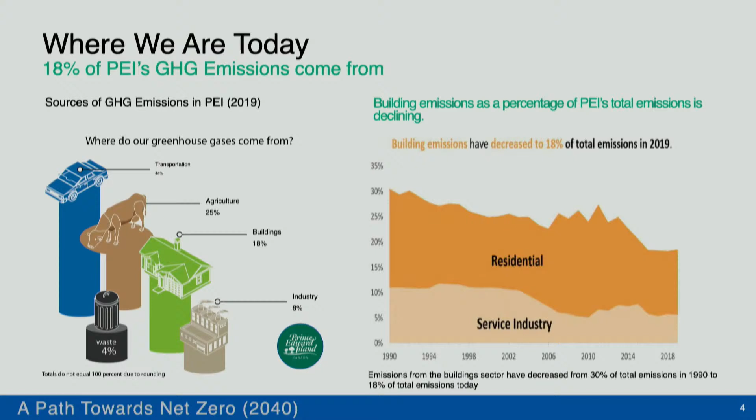I'll get into a little bit of what we intend to do, and you'll see a sneak peek from our soon to be released net zero plan for the province. So in general, we've got three main goals for this chapter.

The first is to make existing homes and buildings more energy efficient. So facilitating retrofits, the adoption of energy efficient measures, and switching to cleaner fuels in island homes, businesses, and government buildings. So we're talking about existing buildings.

Secondly, we'll construct or try to incentivize the construction of more efficient homes and buildings. To do that, we think we need to be at the forefront of national building code adoption, and the adoption of stretch codes beyond the current building code on PEI.

And thirdly, we would like to pilot and scale up cost-effective solutions on PEI, looking to become a demonstration site to scale up and pilot early stage and innovative systems and technologies. What I'm talking about there is not just heating systems, but building materials, building envelope materials, windows, doors, insulation, you name it. Anything that can reduce our carbon footprint in this sector, we would like to be at the forefront in researching and scaling up and deploying those technologies.

So I think those are our three high-level goals for this sector, and I'll get into a little more detail on all three here on the next few slides. Firstly, and this may be the most difficult of all three, is to make existing homes and buildings more energy efficient. So we know that we need to facilitate the adoption of energy efficient measures.

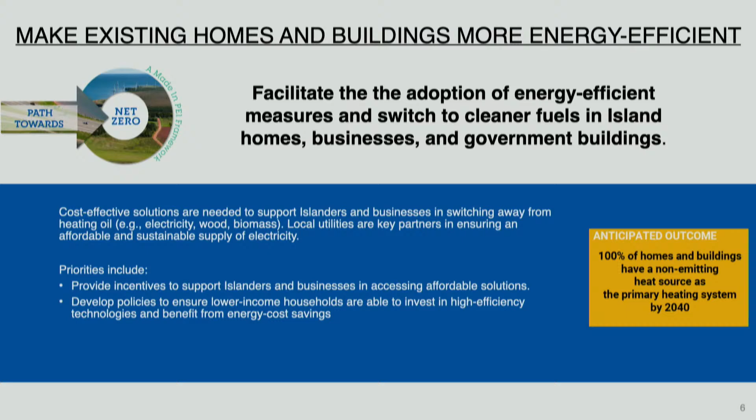On the second goal here, constructing more efficient homes and buildings, we'd like to be at the forefront of national building codes and the adoption of stretch codes for PEI. We're looking to establish the necessary environment and supports to facilitate adoption of the National Building Code and National Energy Code, develop and support stretched or advanced code provisions for PEI that exceed national building codes, and lead by example through investments in net zero ready, net zero new construction of government buildings, including schools and hospitals, in partnership with the federal government.

We'd like to provide incentives to support growth in building affordable, energy efficient homes and commercial buildings, including programs specific to the needs of low-income islanders. So in this case, we're doing what we can to be at the forefront of national building code adoption.

We also want to make sure that when people are making decisions on new buildings, whether residential or commercial, we're incentivizing them to make the best decision possible to reduce their energy consumption and greenhouse gas emissions. We can do that essentially through carrots and sticks, and one of the tools we have at our disposal is the new home construction program at Efficiency PEI.

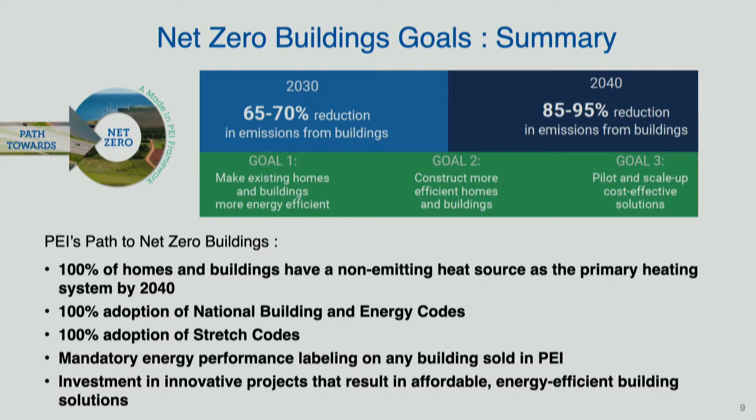To summarize, this sector in particular is one where we've made really good progress to date on PEI. There's significant momentum in moving away from fossil fuel heat. We've got a really mature suite of programs here, government incentive programs delivered through Efficiency PEI, that all lead to some really good momentum in the right direction. Really happy to share these targets with you folks, and interested to hear some of your questions, and I'll throw it back to Bill.

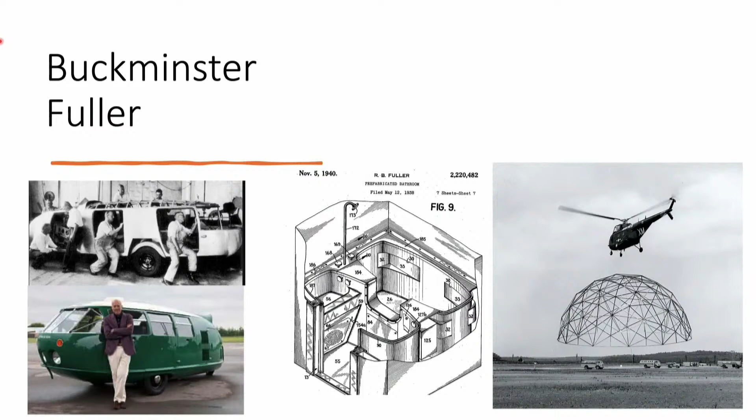In the bottom left is a picture of Norman Foster, who commissioned a replica of the Dymaxion car to be built, so he actually does own that. Norman Foster and Buckminster Fuller had a professional friendship going back a long ways, to the point that Norman was giving Buckminster a tour of the Sainsbury Centre. This might look familiar to a lot of people in the architectural industry in Norwich, England.

Foster was well known for his light and airy structures, and this is sort of exemplary of that. But at the end of the tour, they went for coffee, and Buckminster says, 'But Norman, how much does your building weigh?' He didn't have an answer for that, and I think most architects would not. Perhaps our structural engineers would, but we'd be hard pressed to say how much a building weighs. By the end of the week, he did have the answer: it was 5,328 tons, and most of it was hidden below ground.

So it leads into where we're going now with talking about the impact of materials and the weight of materials. Where Buckminster was focused on the mass of materials, we're now moving into something where it's not just mass, it's the emissions associated with materials.

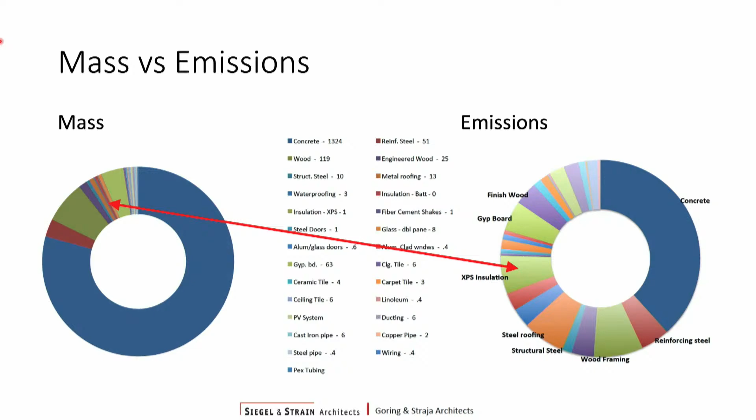This slide shows an example. Siegel and Strain Architects did a very detailed life cycle analysis of the structure, envelope materials, and finishes in a commercial building. On the left you see the mass of each product; on the right you see the emissions associated with those products. It's quite different - by mass it looks like about 80% concrete, but the emissions from concrete is only about a third of that. Likewise, the XPS extruded polystyrene insulation barely shows up as a line on the mass side, but becomes quite significant on the emissions piece.

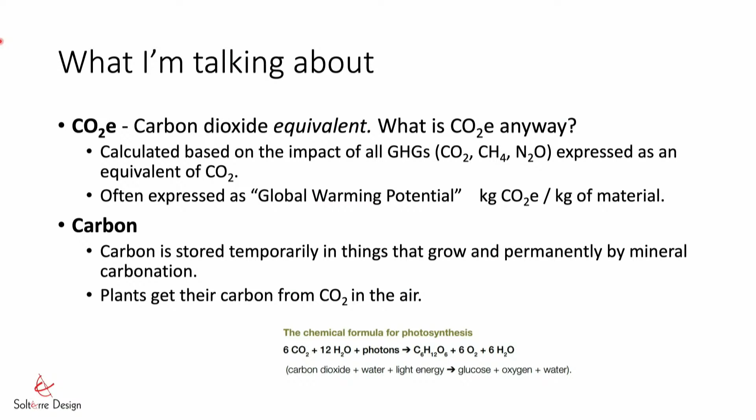So what are we talking about when we talk about emissions? For the most part, we're talking about CO2, carbon dioxide. People often use CO2 and carbon interchangeably, but our buildings don't have carbon emissions, they have carbon dioxide emissions, and they have other emissions as well. In general we're talking about greenhouse gases, GHGs. Because there are other greenhouse gases besides carbon dioxide, we usually see it expressed as a CO2 equivalent, or CO2e - that's the terminology you'll see. When talking about materials, emissions are discussed in terms of global warming potential - that's the significant focus.

But there are a lot of other impacts that materials have - we're not even talking about acidification, particulates, smog, and a bunch of other impacts materials have. So when you get into that type of analysis, it can change the game a little bit as well.

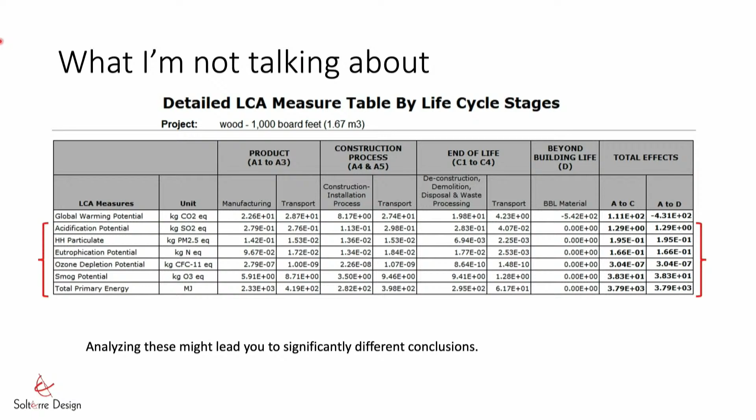It's the carbon involved in the manufacturing of those materials. We'll talk a bit more about where that embodied carbon impact is. But I think most of us could agree that we don't have 90 or 100 years of a building life that we need to look at. We're looking at something more immediate.

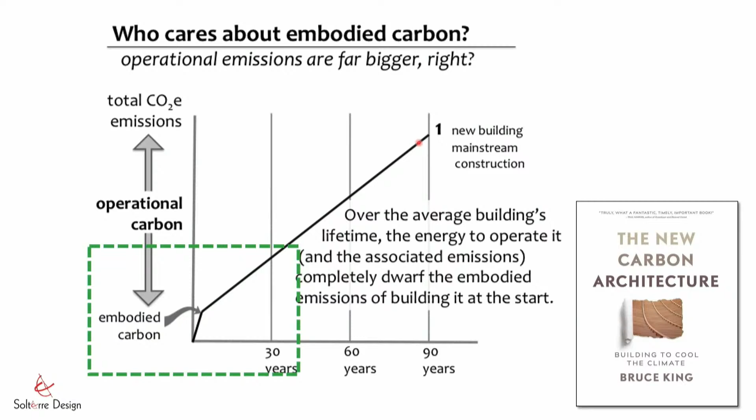2050 by Canadian targets to be net zero, 2040, which is fantastic to hear for PEI's goal. And some people are even saying 2030 is what we should be looking at. So if we narrow that down, this embodied carbon piece becomes a lot more significant.

The other part of it is the operating efficiency of the building becomes a factor as well. Obviously, the less efficient a building is, the steeper this emissions curve along the top is. If we build an energy efficient building, that curve becomes much less. And for all intents and purposes, a net zero building has no operating emissions along this line as well.

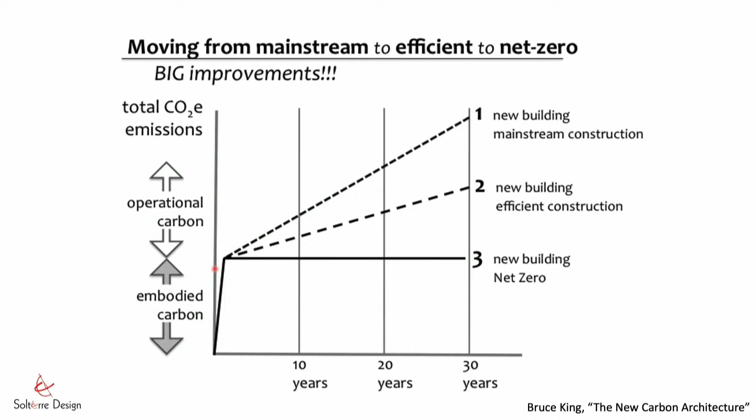So when you get to a net zero building, almost all of its emissions are associated with the embodied carbon. And that's why, as we talk about net zero emissions or operations, we need to talk about the embodied carbon part as well.

The other thing that's important about embodied carbon is it happens before the building is even opened. So that impact happens for the life of the building, as opposed to incrementally in tons per year of operation. A ton of CO2 emitted at the beginning of the building actually has a greater impact than a ton emitted in the 10th year, the 30th year, or the 100th year. So the time value of CO2 is also an important factor.

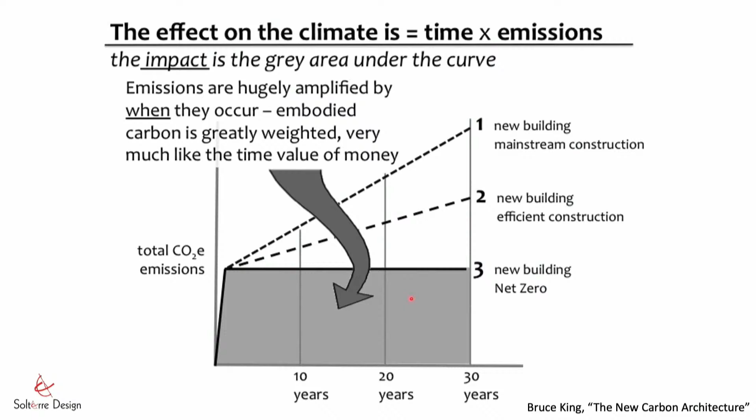Now here's another one to think about. Another strategy is, why should we build new when we can retrofit? We have a significant amount of embodied energy, embodied carbon, embodied emissions associated with buildings that are already built. So what happens if we retrofit those and improve their performance as opposed to building new? I'll show an example of that later on.

So here's the hypothetical. The embodied energy in a high performance building here is much lower than a new building. And if you do a high performance retrofit, its emissions are going to be lower even than the embodied carbon of a new building.

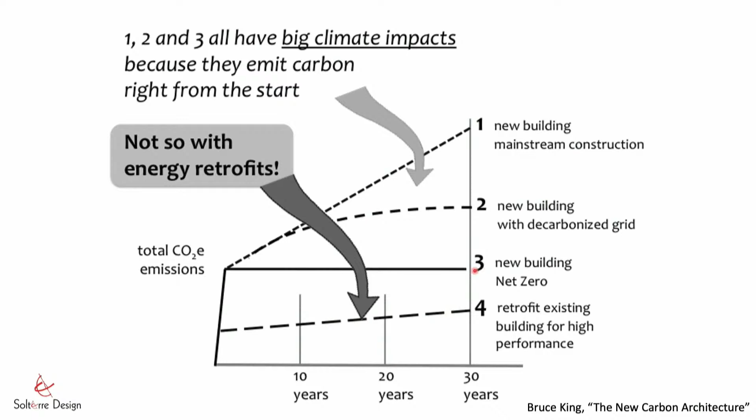Now, when we talk about the embodied impacts, this is an internationally acknowledged life cycle stages of materials. There's the product stage, which is A1, A2, A3 - that's when the product is being manufactured. Then there's the construction stage, the use stage, and the end of life stage. Each of those does contribute to the overall life cycle or overall impact of a product or a project.

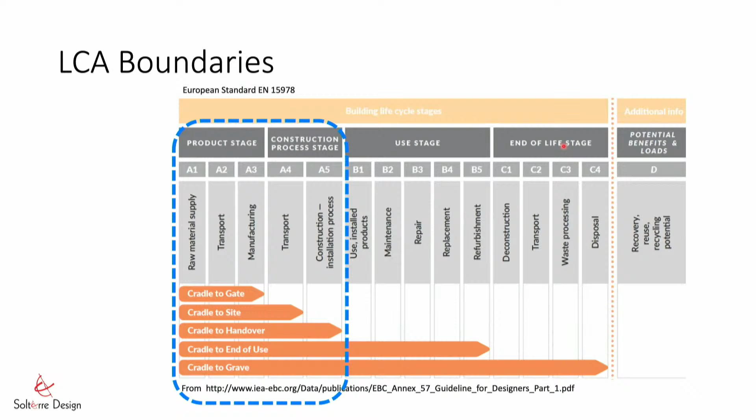But if we look at how that breaks down, here's a school that we did a life cycle assessment for. We looked at the envelope and the structure. So there's two things that immediately jump out at us. One is that the structure, in this case, was by far the greater impact than the envelope.

The second thing that is obvious is that the first stages of manufacture, shown in blue here, and then the transportation and construction, take up 80% or more of that impact. So a lot of that impact happens right at the very beginning of the project, and much less so carries on through the use stage and the end of life stage.

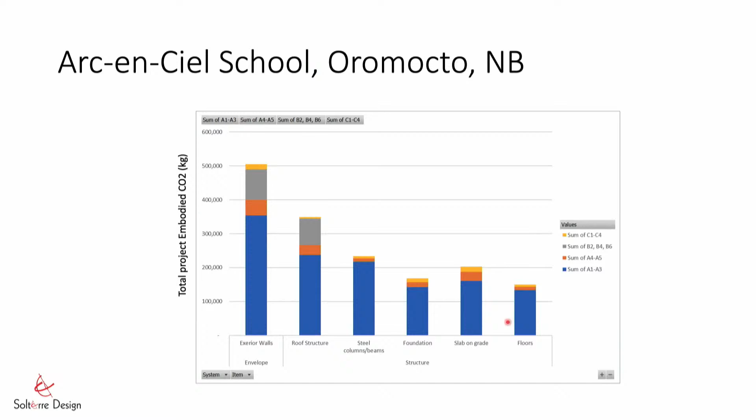If we take a look at a breakdown of the envelope versus the structure, we'll see that the roof structure in this case was the most significant piece, and foundations, slabs and floors were on the lower end. But overall, the structure remains the most significant piece.

Now, one strategy for dealing with carbon is to look at the very fundamentals. What is the project made out of? Here's a very simple model using the Athena Impact Estimator life cycle analysis program, where I just took a 30 by 30 meter single floor and did three designs.

One was with steel columns and beams using a 7.5 meter by 7.5 meter grid. Another was using concrete on the same grid, concrete with a 6 meter by 6 meter grid, and wood with a 6 meter by 6 meter grid.

And the output that comes from Athena clearly shows us that wood is a lower impact structural system, which is not a surprise, I think. It also shows that even within the same construction systems, the way you design the spans and the complexity of the design make an impact as well.

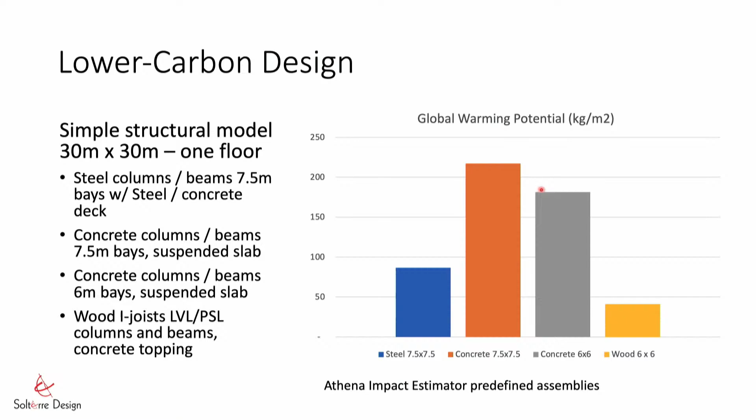When it comes to looking at materials themselves, there's a lot to take into consideration, and every product usually has a fairly significant range of options.

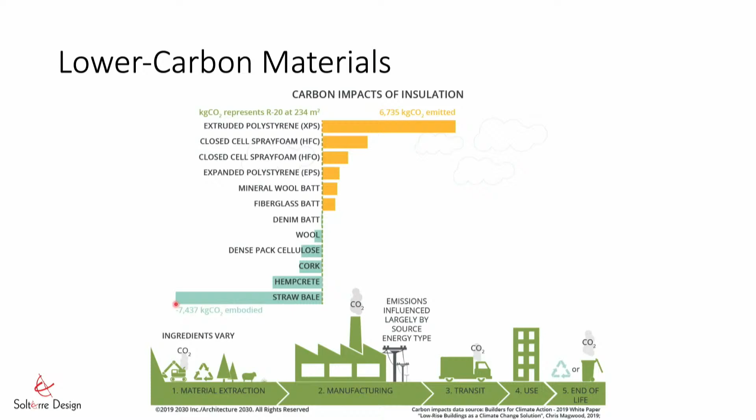As we come down to lower and lower impact materials like mineral wool, fiberglass, and denim, we're starting to get into natural materials. The reason they're on the opposite side of this center line is that they actually sequester carbon—as they're growing or being produced, carbon dioxide is absorbed as they grow. So these products actually have a negative impact in a positive way on greenhouse gas emissions.

You'll see more and more carbon sequestering materials come onto the marketplace already—there are quite a few. It's often in the finishes, framing, and insulation materials. I'm not going to go through this entire list, but it's a growing list of products that actually sequester carbon in them, so they counteract the adverse effects of materials.

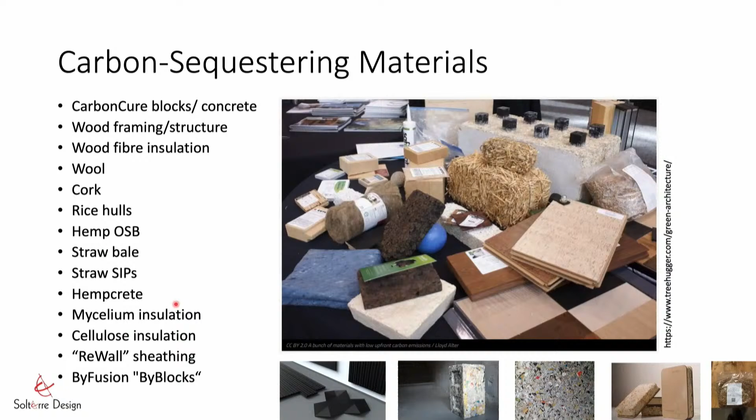Without getting into a lot of detail, there's a lot of debate about how you account for wood. Yes, wood is a lower energy material, but what is the source of that wood? For example, if we all decided to build all buildings out of wood right now, we'd be in dire straits from a forestry industry standpoint, and we'd have a lot of other unintended consequences.

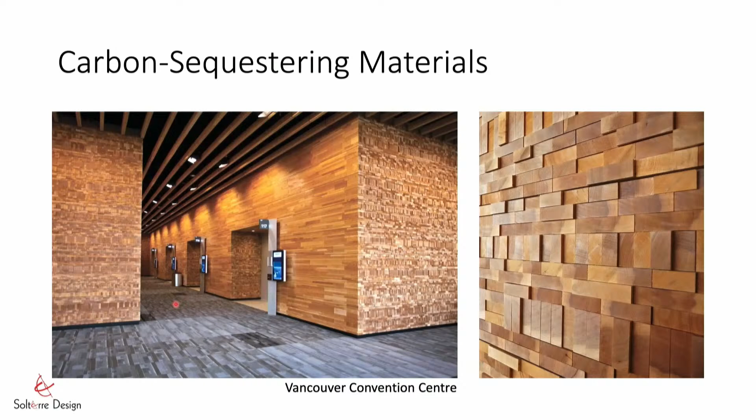So I'm going to jump in here to answer Bill's question about what we're up to here at Solterre on this topic. Keith, as you can tell, dives deep into all things advanced and leading in green building, and has now for a number of decades. We've been able to expand this discussion into the school system.

We've been teaching at the School of Architecture in the master's program for the last 3 years, a design and tech collaborative, or co-requisite course, called Net Positive Architecture. We're really pleased that this school sees this needs to be something particularly focused on within their curriculum. It's been a really fun opportunity for a team of us at Solterre, 4 of us in fact, teaching as a collaborative.

This is a screenshot from a concept board, a data generating, idea generating conversation we had with our students. In the past 2 of the 3 years we've been teaching, it's been online, so that's been an interesting one. We're seeing that the vocabulary is getting really rich—it's not just all called green building or being a green architect or a green firm.

Certainly we're in this net zero conversation, but we're really needing to push it all the way towards a regenerative building. So we're talking about doing less harm on the carbon front, as Keith has outlined, and pushing our work towards net zero and net zero carbon, where we're doing less harm, or better, the living building challenge—of which we have a few examples locally or in the country and a few more worldwide—is a program we can work towards. We have yet to have a living building certified project here at Solterre.

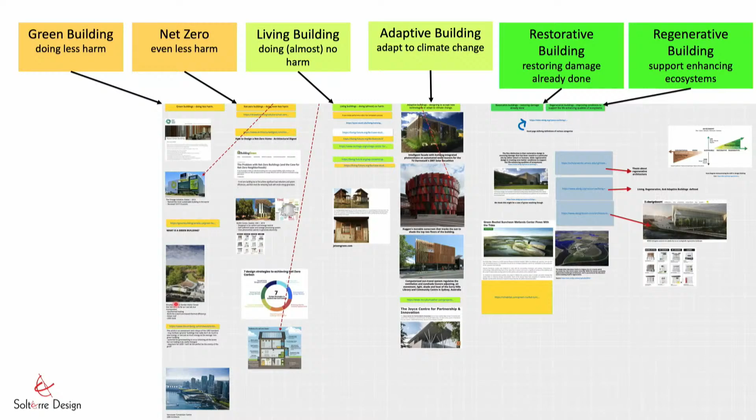But we're talking about adaptive building towards restorative building. In fact, our sights should be on regenerative building as the ultimate goal, where we can be enhancing our ecosystems rather than just thinking we're doing better. There's some pretty exciting work out there worldwide, and certainly students with their curiosity and researching minds are pushing us, and we're kind of along for the ride on that front.

Some of the projects that are a little closer to home that we have looked into more thoroughly—this one, you might be familiar with it.

Chris Magwood is a colleague at the Endeavour Centre in Peterborough, Ontario, where Chris has not only easily achieved net zero energy on this project, or almost all of his projects, but is also looking at zero carbon, zero toxins, zero construction waste. This project, called the Zero House, had a bag and a half of commingled waste, not even close to what we'd normally see on our LEED spreadsheets.

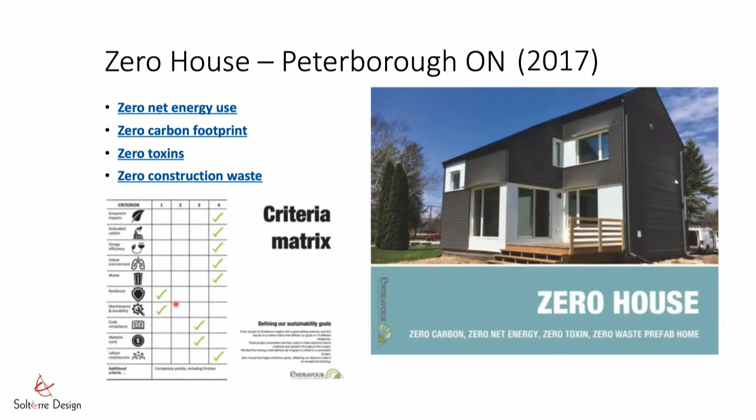This house has been disassembled and re-erected, I believe, three times as a demonstration to show that designing for disassembly with low carbon materials, if not those materials on the blue side of Keith's chart, allows this project to be a fantastic example of heading towards regenerative.

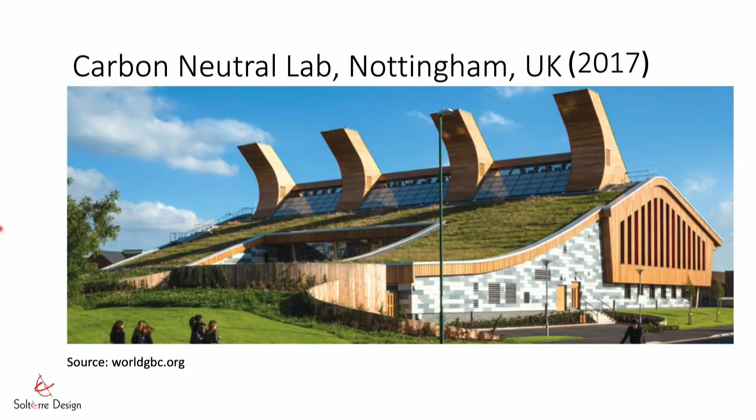Another interesting project, certainly scale-wise, is outside of the residential field, out of Nottingham, UK. We're seeing a lot of projects pushing the boundaries or heading into Living Building Challenge in the university or research facilities, where budgets tend to be available. This one is almost a 50,000 square foot, two-story structure, a chemical research lab at the university, where that type of operation is high energy consuming. So for them to hit net zero and net carbon as well is quite an achievement.

On this side of the Atlantic is the Joyce Center at Mohawk College in Hamilton, zero carbon certified. These are recent projects, and it's quite interesting how few examples are out there, because looking at things with a carbon lens is relatively new in terms of assessments and certification. The Joyce Center is about double the size of the Nottingham project, and it's the largest certified educational building at 96,000 square feet, net zero certified through the Canadian Green Building Council.

Much smaller in scale and much older is our own Solterre Concept House. This is a project that Keith and I started designing over a decade ago, finished in 2012. It was really a chance for us to try out this stuff that our clients were asking us about, so we could have more confidence and experience presenting those aspects of projects.

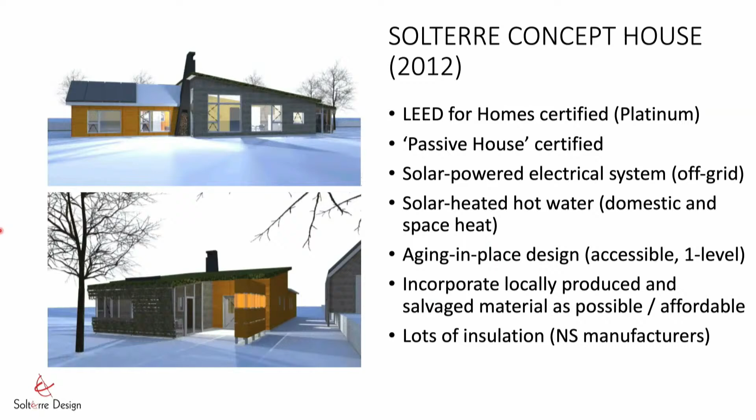We are solar hot water heated and solar powered. It's a one-story building, and considering aging in place was a real key, as it is for almost all of our projects on the boards right now. Many of you may know me as a salvager and reuser of all things, so we've incorporated a lot of salvaged and locally produced materials in the construction, and insulation was a no-brainer for us in the world we're working within.

So 12 years later, it looks something like this, where you'll see both the PV system on the back shed roof and the solar thermal on the front sloped roof. It also has a green roof, which grows a variety of things depending on what the birds drop on it, seed-wise—it varies from year to year. It's been a great opportunity for us to showcase and have meetings there, especially during COVID. It's been our remote working office, tours, concerts, and an easy space to teach from and share information.

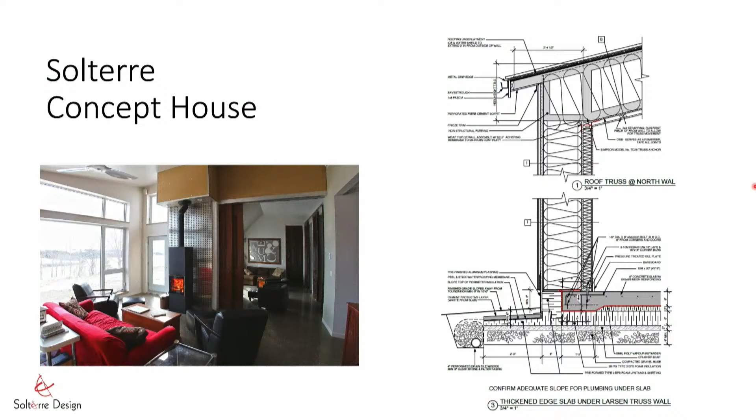The assemblies—a lot of this information is available, so if any are interested, happy to point you towards the website. There's also a link on it, an open source link to our live data on the concept house. You can see how our PV system is doing, and we monitor what the temperatures are.

Really, it's to ensure that the performance that we strove to meet in design is still the case decades later, let alone just the few years it's been. And to be honest, it's kind of fun just to look and say, hey, it's 21 degrees in the house.

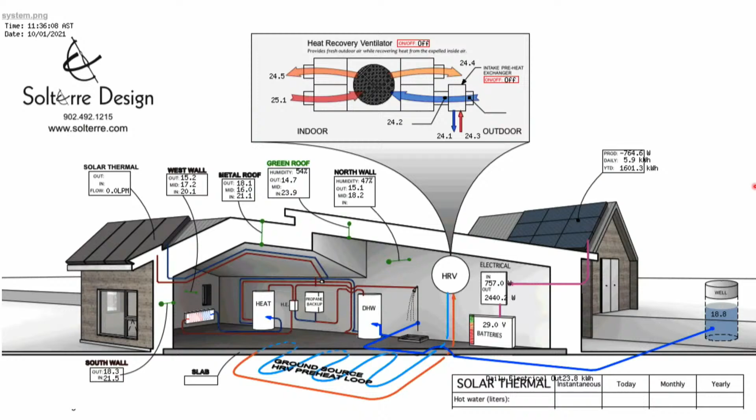Let's head down there. It also points out that when we first started down this path, we were of the understanding that a passive house should never freeze, and we were a little skeptical about that. But when we're not there all year round, if we're gone for a week or two weeks or a month in the middle of winter, everything is shut off and it runs entirely passively. This has proven to us that it typically gets down to maybe 15 degrees Celsius in the winter. So it's proven that point.

And being off-grid, we like the few bills that ever come from it, except for property taxes. So we're in the process of actually renovating a circa 1890 building in Lunenburg so that the concept house can become full-time for us.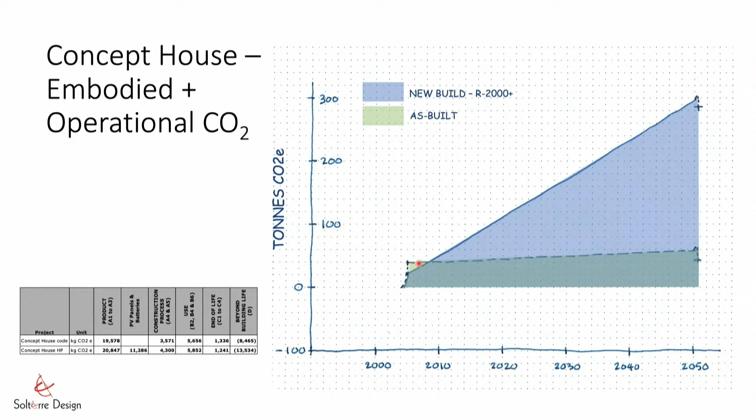What actually happened is our embodied carbon is actually higher. We put in thicker walls, more insulation, and here I included the cost of the impact of the photovoltaics and batteries that are involved. So our embodied energy is actually significantly higher, but being virtually zero emissions, being off-grid, we do have some fossil fuel use, just for backup heat, our domestic hot water, and for cooking. So that's what our emissions look like because of the system we did. You can see that the investment in the additional embodied energy and insulation paid itself back within about two years. That's our good news story, that we've got the proof in the pudding.

2015 already. Saltstone is one of our projects where we are blessed that clients come to us wanting us to push the proverbial envelope, who wanted to hit a passive house certification here and hit net zero.

The one other challenge, as all projects have their various challenges, this one, the site had no accessible water. Previous attempts to drill and dig came up salt water. Hundreds of thousands of dollars had been attempted, which is why the property came affordably to these clients, who had the inkling that in fact we could do a rainwater collection system for 100% of their use, which really drove the butterfly roof here. So we collect off of both of these surfaces down to a cistern through those columns that you get a little peek of. This is on the rocky terrain near Peggy's Cove, if you're familiar with the South Shore area.

That was a project where the clients were pretty excited when their first year's bill - it took a bit for it to hit that net zero, but in fact that client and this one both receive a paycheck from Nova Scotia Power. This is called Groundswell.

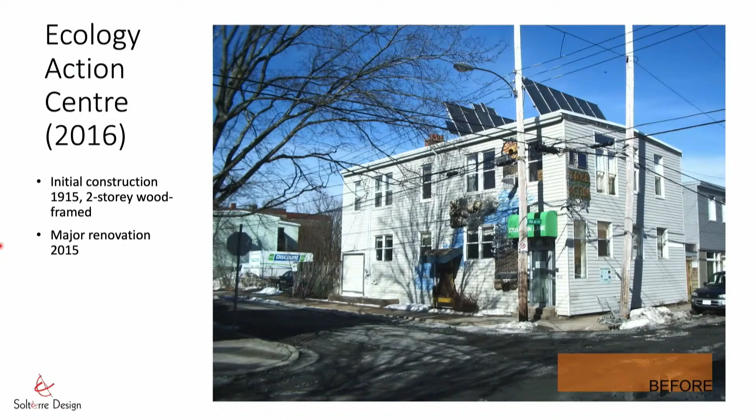This is probably a very typical looking building. It was a 2-story residential salt box built in 1915. It had a considerable renovation in 2015, which actually caused us more of a challenge because of the materials that were introduced in 2015 as steps towards higher energy efficiency.

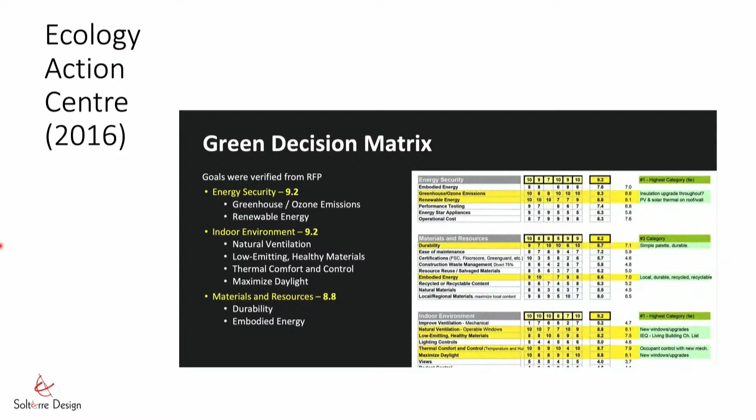Working with a group and with an existing building that had many issues, we use what we call our green decision matrix as a way to help prioritize green issues or interest from our client, especially when there are multiple people around the table. This client needed 50% more space and had a high concern about energy security with relation to GHGs, and wanted to focus on renewables. They had very poor indoor air quality as well, so that was a close second in terms of focus on choice of materials and healthy materials.

So the project is underway. You can see it's kind of gained a story here. We split and dropped the main floor so that we could have an accessible half floor, something that's a super challenge on urban locations in terms of getting our older building stock to meet accessibility requirements. You'll see the assembly here is a rock wool kind of combination in terms of the wall assembly.

The foundation was reused as well. I can get into some of that on these pictures. That previous picture perfectly highlights what Derek had said from the beginning, in terms of dealing with existing buildings: deal with airtightness and insulation. So there's a perfect demonstration of that.

Good point. So in fact, yeah, with increasing the office space by 62%, we actually, with the PV, decreased the energy consumption by 65%, and the PV system offsets 50% of that. So they're down to a low operational budget going forward. As a nonprofit, certainly important.

They could sell the building and move out and build off in the industrial park somewhere, and again build high performance. The decision was twofold. One, they're in a fairly dense neighborhood in north end of Halifax right now, ideally located in terms of walkability and cyclability, so that has an impact much beyond the building use itself in terms of reducing carbon. It's very easy to get to.

Another part was they wanted to be able to demonstrate that they can reuse buildings, and we do need to retrofit buildings, so this becomes a demonstration for them of how to do that. What this chart is showing is if they had built the same square footage with a new build at high performance, same sort of levels of performance as we've done with the retrofit, this is what their carbon footprint would be. It would be up over 400 tons of CO2.

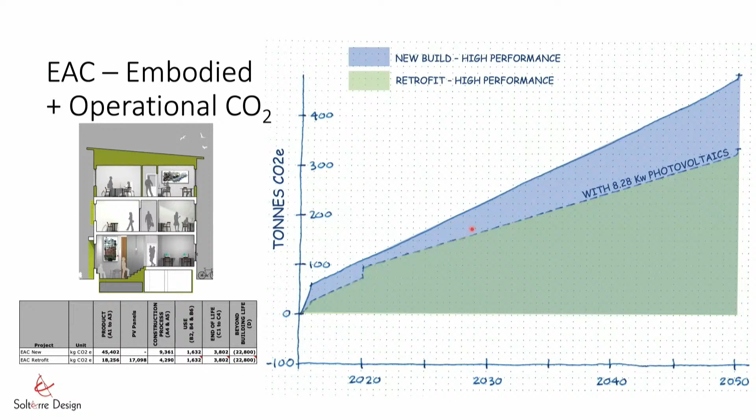With their retrofit, their embodied carbon is much lower, so they have a much better starting point. Even if we had the same energy input and same high performance systems, on our Nova Scotia grid we're going to be better performing throughout the life of the building.

One of the things they're doing is putting on a PV system, about an 8 kilowatt PV system. This little bump accounts for the embodied carbon of the PVs, and that's also why it changes that trajectory of energy. It shows that on our Nova Scotia grid, the investment in PV pays back very quickly.

So that leads into discussion about when you are putting in PVs, what is it offsetting? In the case of Nova Scotia, we're offsetting a relatively dirty grid. It's a different discussion if you're in a scenario with a utility that has a clean grid.

Even in the decarbonized world, following the trajectory of the federal government mandate of being decarbonized by 2050 with a gradual path to get there, it demonstrates that retrofitting, even at a high performance level, is a better option than building new.

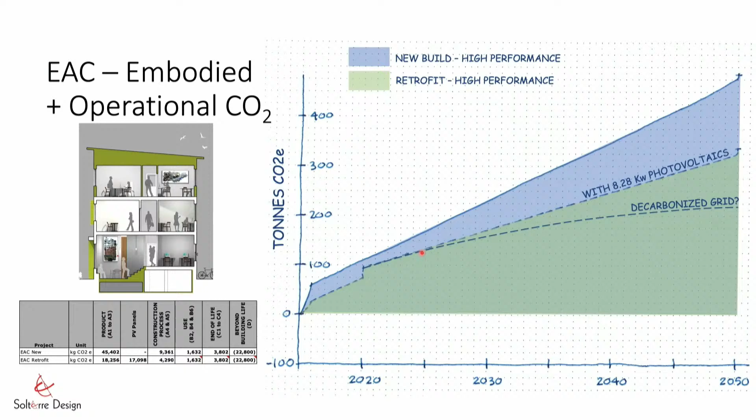So those are fairly recent projects, and here's a few that are on the boards. Soon to break ground is the Nova Scotia Native Women's Association, a resiliency center for the Millbrook Reserve. It's a 10,000 square foot wood framed project, single story.

We're hitting net zero energy, shooting for net zero carbon on this project. It's wood framed structure and cladding, cellulose for the interior. It's an absolutely ideal site from a passive solar point of view.

The layout, it's a two-part building. In essence, it's an office administration wing, and then the resiliency center, which has a cedar room and knowledge room, wellness center, a kitchen, a maker space, and a children's area.

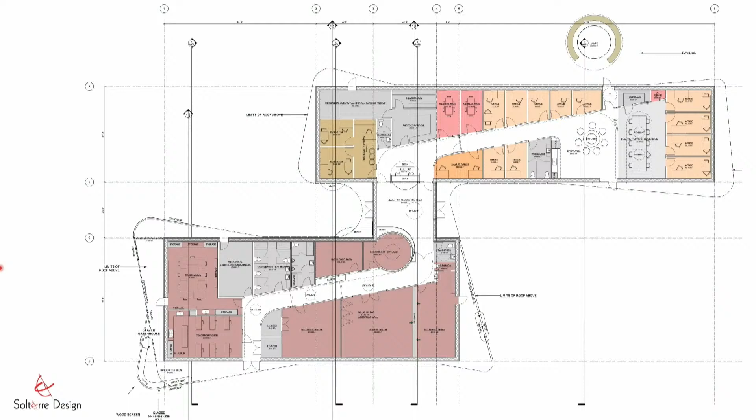It's been an absolutely delightful project to work on with the Nova Scotia Native Women's Association, and I can't tell you some of the things they are challenged with every day in their working environment. Creating this delightful play space, not only with the interior rooms but exterior, is really fun. Our responsibility in making this a highly efficient, energy efficient, and beautiful space weighs heavy on us, and we're doing that in a very collaborative process with this client group.

Bringing our team together includes, from day one, our energy consultant, who we work with on pretty well every project we've got, putting everything on the roof of this project in terms of the PV grid to get us to that net positive. It's about a 63 kilowatt grid system.

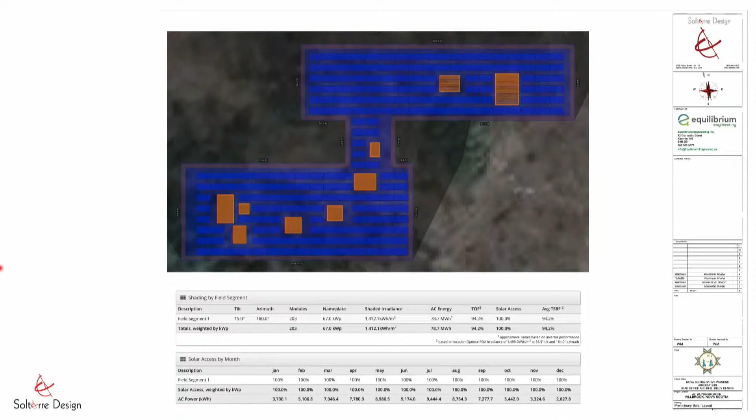The orange things you see there are planning around the skylights and the mechanicals on the rooftop, hidden by our ribbon skirt band of a parapet that you saw. It's a super fun project, and we hope to break ground on that very soon.

Also working with the Unamaki Institute of Natural Resources on their administration building and research center. This is up in Cape Breton on the Bras d'Or, hitting net zero energy and hopefully carbon as well.

Focusing on wood in a bit different way, with nail laminated timber that we hope to harvest, process and manufacture locally, spanning our main floor and upper roof structure of this two-story building. We don't have a pending date for construction, but it's another great example of projects pushing that net conversation into the carbon landscape.

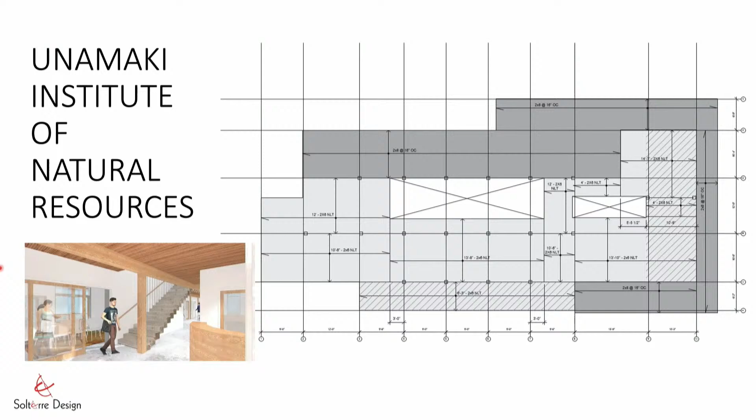To summarize, the work I think we have in front of us as architects, our responsibility, is to go after how we can repurpose our existing building stock and infrastructure. If not the entire building in place, use as much of it to salvage and recycle those materials, whether in situ or in other projects, and look at that as a resource stream rather than a waste stream. Minimize that palette of materials we have to work with, take out a few layers in those assemblies and make them better, more carbon focused layers. Our buildings will be better for it in terms of that analysis.

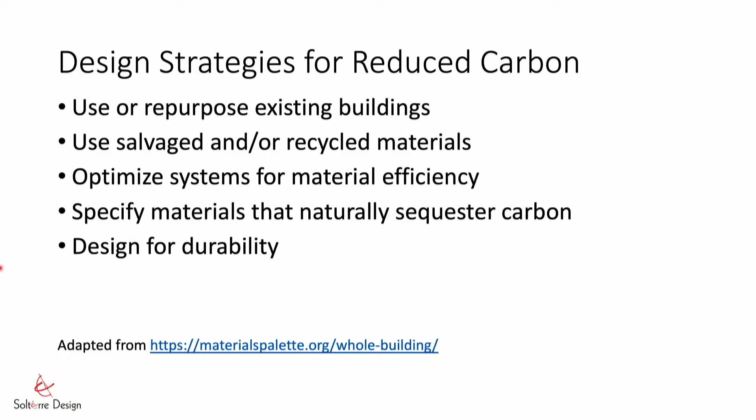And ultimately designing for durability. Here we are 30 years into our careers at Solterre, and these things need to be assessed at the 30-year point and the 60-year point, so we can look back and see how they're doing, and do that same analysis going forward. Hopefully that's a good summary wrapping up on design strategies for low carbon and high performance architecture.

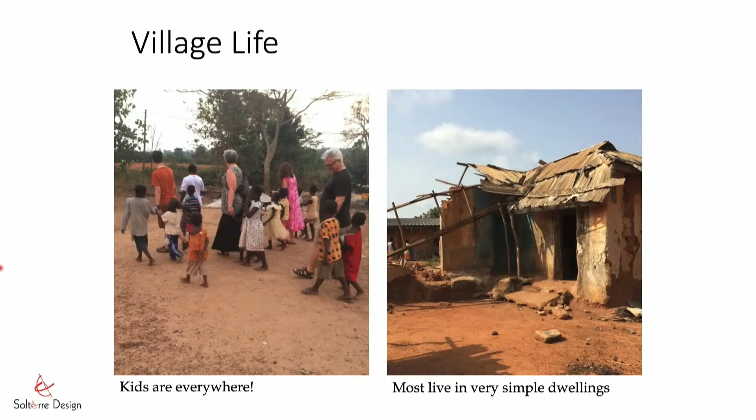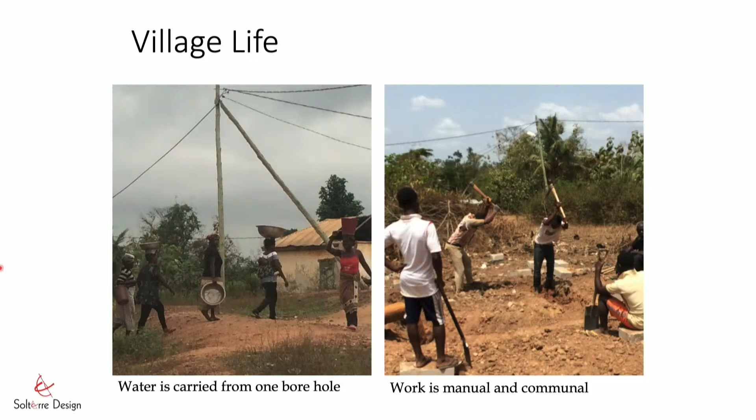Down at ground level, that grid of plantations is not so apparent, but what is apparent is a very simplistic lifestyle. Most live in very simple buildings, and things like water and electricity are hard fought for. Water is carried from one borehole in the village for the entire village of 600 people, carried manually - there's no distribution at all. Work is mostly manual and communal. To bring in a piece of equipment like an excavator or a dump truck is very costly for those in the village.

Arriving in the village, we had to ensure that we had the complete support and agreement of the chief. And there's nothing nearer and dearer to their hearts than bringing soccer balls and shirts. So we have this ongoing collaboration with the Halifax City Soccer Club, bringing teams worth of jerseys. This has a lot of those communal workers happy to join in, because we know we're also supporting their children and their teams nearby.

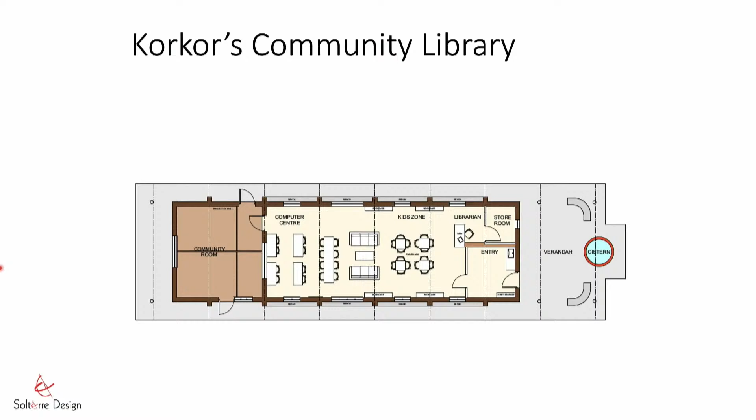Work got underway almost immediately because our time was so short. We collaborated on a very simple design for this rammed earth building. It's about 3,000 square feet, located a couple hundred yards from the elementary and junior high. You'll see large overhangs, a veranda that wraps around the building, broken down into two spaces: the main library with a computer center, and a community room. One key thing here was also the cistern and planning for a roof water collection system.

Rammed earth construction is something I'm not sure how many of you are familiar with. There are examples in Canada, even in Saskatchewan. We have yet to do a rammed earth project in Nova Scotia, but have done many now in Ghana. The library was a lovely example of working with this community group and crew to ram about 40 to 50 feet of wall, about 3 feet high, every day. After about 25 to 30 days, we had the walls of our building erected out of this monolithic mixture.

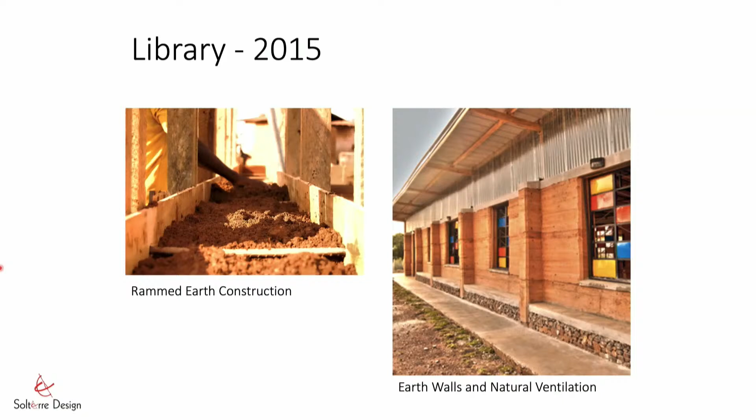There you see it, the walls up and our roof framing with a very large overhang to, one, gather rain, and two, provide protection so that the veranda areas are, in fact, like spaces as well. The gathering, the seating against the building around the perimeter becomes key to get out of the intensity of the heat with the Ghanaian climate.

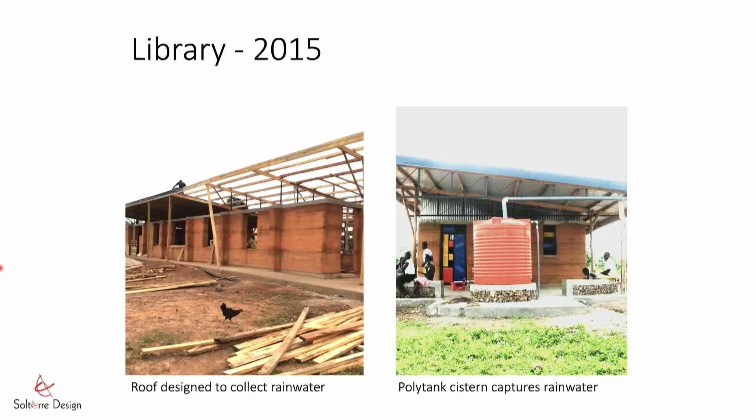Surprisingly, with a season of 6 months rain and 6 months no rain, rainwater collection wasn't very far along in design in the community. We were surprised that we had the first kind of rainwater collection system that was different than just having buckets at the bottom of the roof slope. Our bright orange polytank is front and center, a system we're showing off.

After 89 days, incredibly, it got completed. We worked incredibly hard, but the results were well worth it. And the price, including labor, is a little different from our own climate and economy here. We finished it for about $20 a square foot.

Every time we return, it is knee-deep with lots of people in it. It's become the daily classroom for the junior high program at this nearby school, for the kids to learn their IT course. Amazingly, prior to us getting there, they were learning their IT course using a cardboard box, trying to think of it as a computer screen, and they would hold a rock for a mouse. We're so pleased to help lead this community into giving these kids a chance on their national exams.

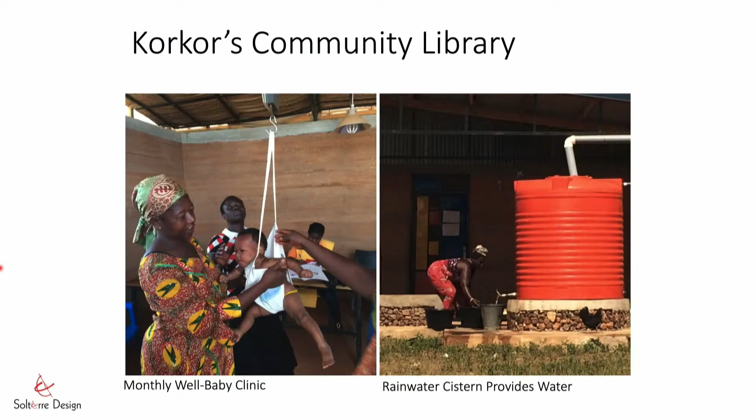Other things that happen there are a monthly well baby clinic in the community room, and as I mentioned, the rainwater collection cistern being another source than the main borehole in the village.

One of my favorite things, very similar to working with the Nova Scotia Native Women's Association, is working with women in general. These women are all putting in about 3 to 4 nights a week taking literacy classes, many of them never having gone to school at all. There are volunteer teachers, and the library becomes the center place for that learning opportunity.

In building the building and fundraising for it, we're still responsible to the community to make sure they can afford to run it into the future. Amazingly, the electric company of Ghana, compared to Nova Scotia Power, charges about triple the amount per kilowatt hour as what we pay here. On their monthly incomes, that's just not an affordable option.

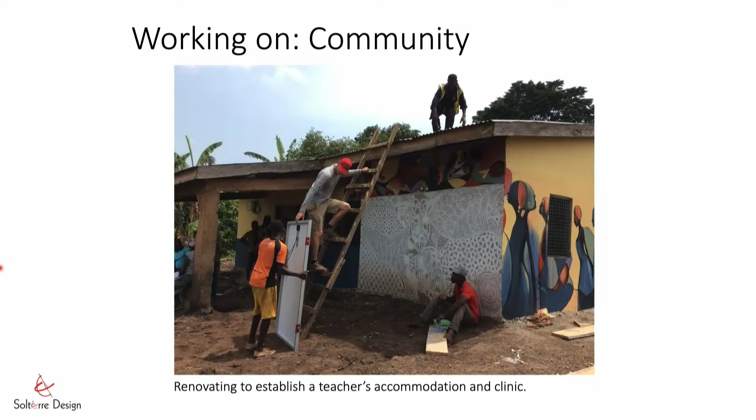So round two for us was fundraising to go back and take the library off grid. There's one of our great friends, Alex Ross, on the roof with our favorite carpenter, getting the library going off grid. If you notice, the Nova Scotia flag is up there with the Ghanaian and Canadian flags as well. We not only took the library off grid, but in a retrofit of sorts, we helped the energy bills at a community building which houses teachers and has a clinic there, and worked with a local artisan who did some incredible mural work.

What we've realized is our work doesn't always have to be building-focused to have an effect. We wanted to make sure our own footprint wasn't detrimental to being there.

The first year, we felt it was the amount of water we were drinking out of these half-liter water sachets. We calculated that as a family of 4 over 89 days, we'd use over 1,000 of these water sachets. Our thirst was overtaken by the guilt.

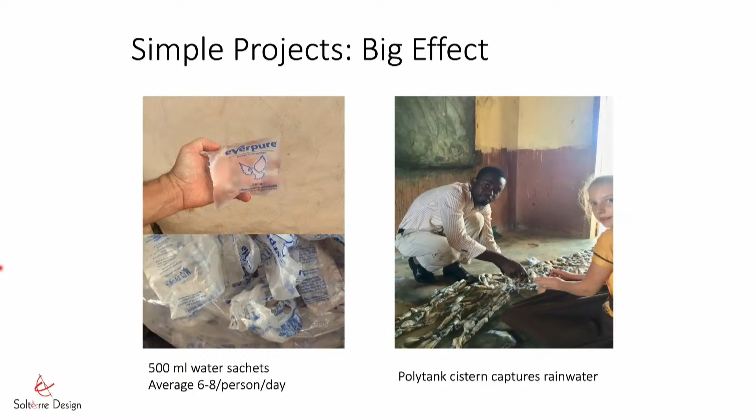We felt like we needed to figure something out. So with the kids in the community and some ingenuity, we worked with the teachers and the kids to create... that's the wrong note, it's not a polytank cistern at all. It should say teacher and Lil working on a volleyball net.

A weaving project that looked at waste as a resource, again a topic near to my heart. We took all of those bags we would have used up in our stay and created a hammock, tried a bunch of different projects. Volleyball being another family sport, we used collected bags to create a volleyball net. I think this process has continued since we've been gone, and there is very little waste on the ground of these plastic sachets.

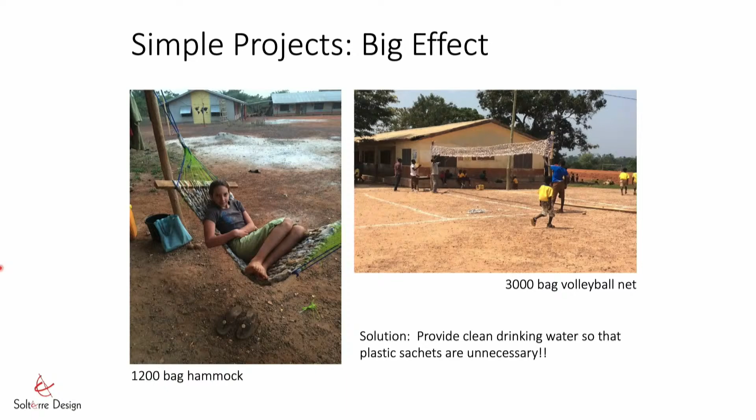We've also converted to filters, charcoal filters, so anytime we return, that's minimized as well.

Here we are on an education opportunity right now, sharing with you on World Architecture Day. Education for us is also something we see as a key responsibility to supporting the families in this village and other villages we've met in the meantime, helping their kids through to high school and some beyond that.

Although education is free up to the high school system in Ghana, many areas where there isn't a high school, junior high, or even elementary school is the stopping point, because the cost of transportation, books, and uniforms is too much for most families to afford.

Sanitation - this is not the nicest photo, but this is what we arrived at asking about latrines at the school. This was the school latrine, basically just an open pit.

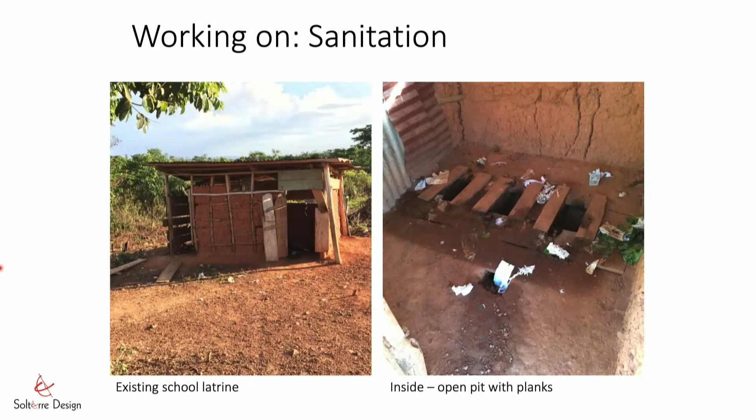The problem with newly manufactured materials like the plastic sachets, without a waste or collection system, is that these materials just end up on the ground - plastics, wrappers, things - there's no place, no system to take them to. So it's a real big issue, as is water, which we mentioned being a scarce commodity.

So there's lots of work out there worldwide on sanitation and waterless latrines. We worked with a system that diverts urine from feces - who knew banana trees love nitrogen-rich urine, so the bananas nearby are growing quite well. After about 8 to 12 months, the compost that slides down at the base becomes usable compost for agriculture, with a very simple aerated waterless latrine.

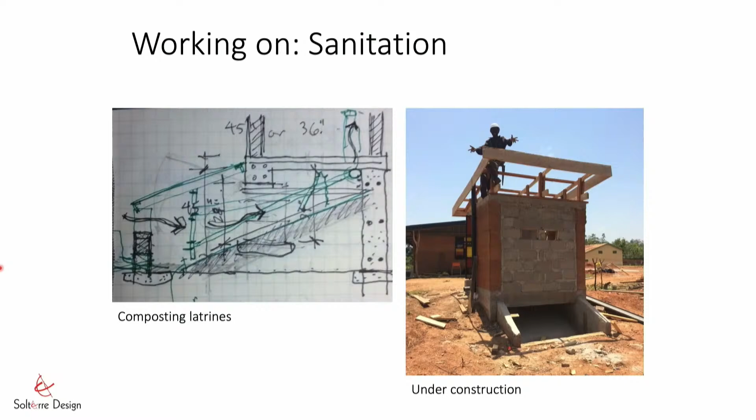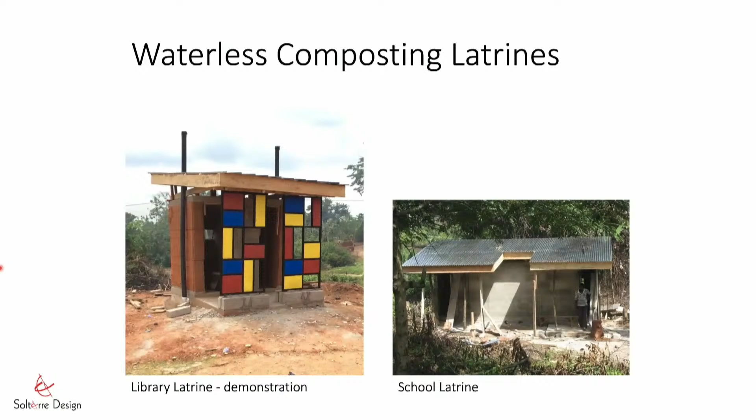The left-hand one is the demonstration used by visitors to our library, and the other is one of the ones at the school. We've continued to build latrines in various areas.

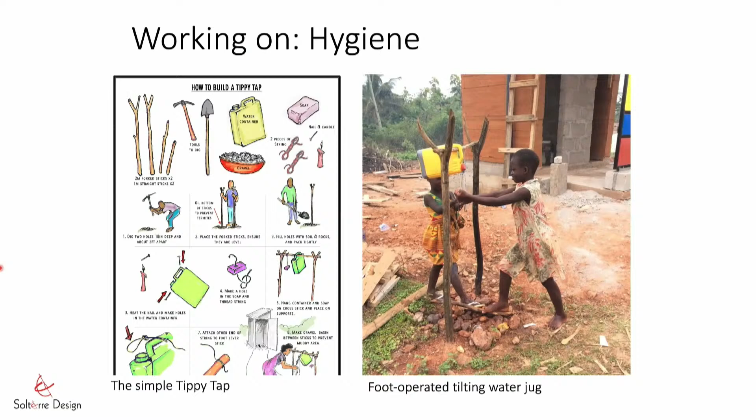Our kids were carrying water on their heads in a bowl, and that bowl was outside each classroom every morning. The first child to use it had the best use, because the next 30 kids using the same bowl of water certainly weren't having the best hygiene practices. But we've really enjoyed the ability to share, test and support projects as simple as the tippy tap.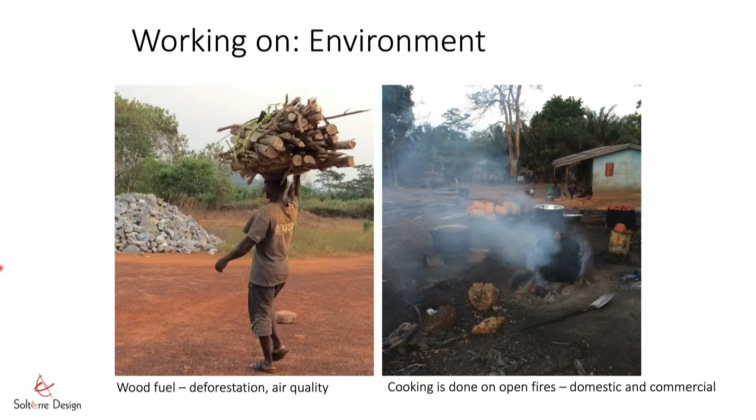Other projects outside the building look at deforestation, which is not as imminent a threat in the region where we are, since it's fairly lush jungle, but more to the north. Northern Ghana has a real challenge with deforestation and lack of fuel source, because we still deal with communities that primarily cook over open fires with very simple materials.

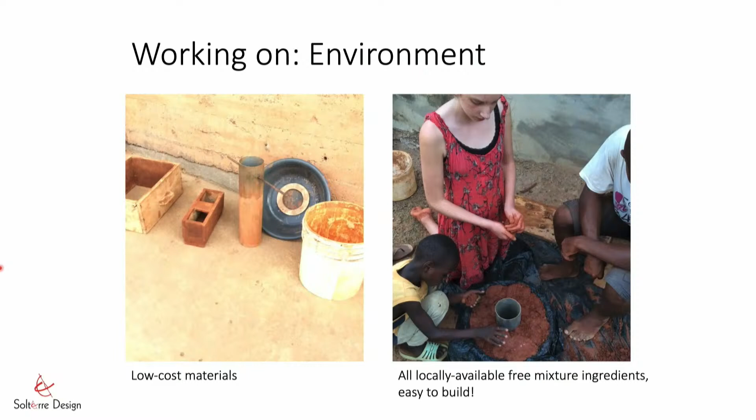There are lots of versions of rocket stoves out there. We've worked on school projects for kids to build rocket stoves, using an earth, ash, and water mixture creating three parts. It's a rocket stove on the right, built with the parts you see on the left, replacing what would be called an open fire or three-stone fire, which is beside the rocket stove there as well.

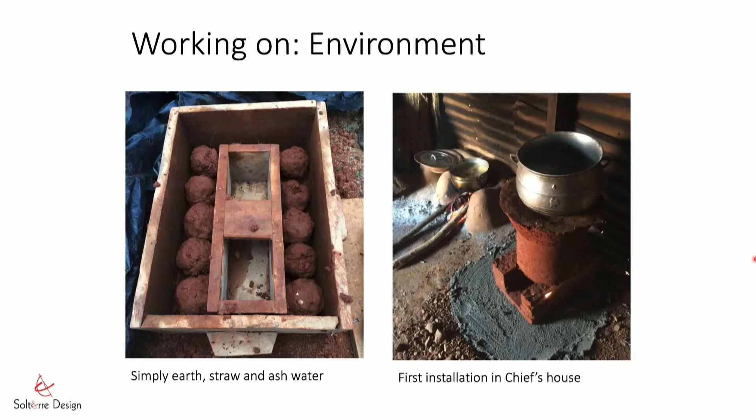The air quality is much improved with a higher efficiency burn on the rocket stove, and it requires far less wood, which saves hours in the day of walking into the forest to cut wood for cooking.

We brought parts with us for kids to try out their electricity lesson, but in fact they were building a renewable lighting kit, and were successful at it with the parts that we brought.

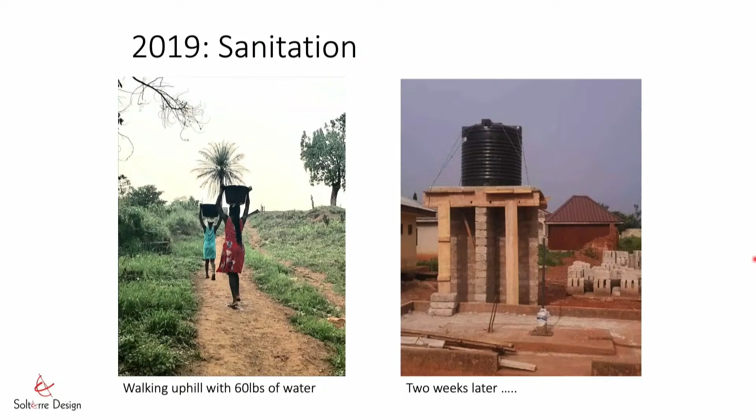We have provided community access to water by building cisterns. This involves a pump and creating a tower, where one woman instead of two—although they do like to gather, it's a bit of time to support each other gathering around the well—a water carrier can do this independently and get much better quality water to their home.

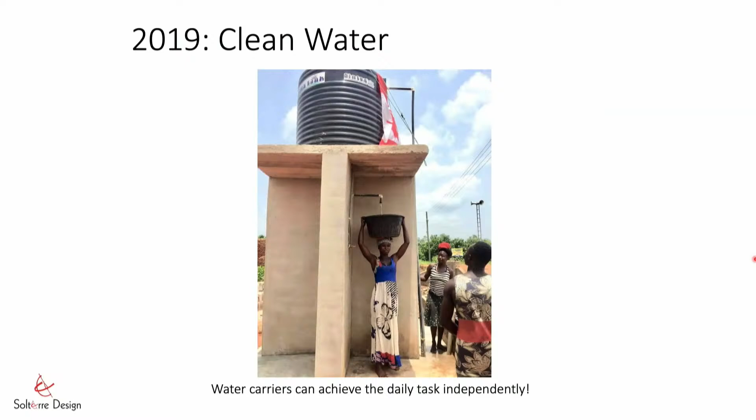So that's on our clean water initiatives.

There's always lots to do, and I would be remiss if I didn't say what we have on the docket. When we head back—COVID has played havoc with everyone's travel schedules, ours as well, getting back to Ghana—we have plans to return and initiate more actual construction projects, including more latrines and community cisterns, and to continue our solar lighting initiative to reach further into non-electrified communities. And of course, to keep supporting our kids to become high school graduates.